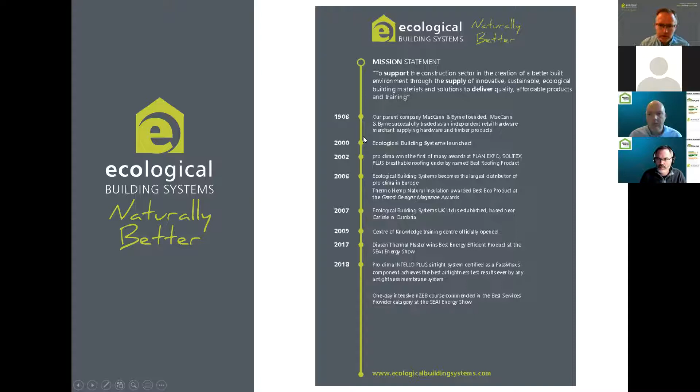My presentation this afternoon will focus on my own house, but I'll give some background information also about embodied carbon and energy and why that's so important. I'll be speaking with my Green Building Council hat on, as well as Ecological Building Systems. In the presentation I'll give a brief background on the project, why I selected the materials I selected with some details, some of the challenges I had to overcome.

There's a lot to go through, so this will be a whistle-stop tour, but hopefully I'll keep the schedule. I know Barry and Simon will pull me off the screen quickly enough if I'm in trouble.

So I built my house in Cavan, that's where I'm from. This is a picture I took during lockdown one morning last April. I was out for a walk with the dog, and my house is just down here. I'm overlooking 3 lakes here where I live.

My father owned the land where I built, and I was very lucky and blessed to have inherited a site about 20 years ago. Really, I wasn't sure if I'd ever build, but 3 years ago I started that process and started building.

Just one thing I wanted to begin before I go into the details of my project was it's World Green Building Week this week, and this year the focus is on building resilience, which I think is very topical and relevant, and also ties in well with my presentation about my house and building with more sustainable materials. There are a number of events on for World Green Building Week that I'll give a link at the end that would be well worth referencing.

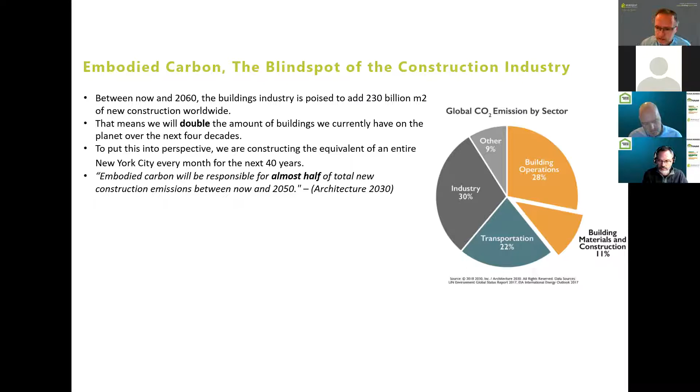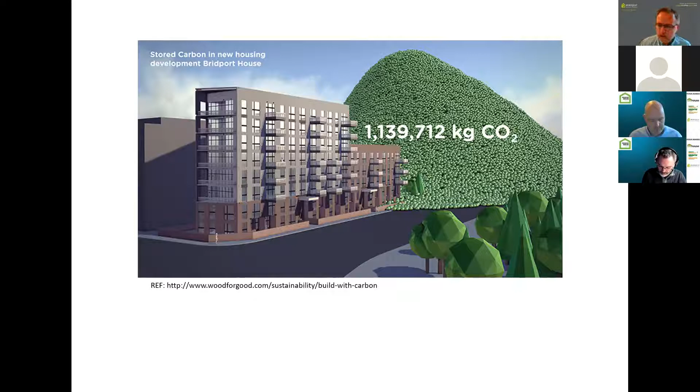And instead of just burning the wood in a stove or something like that, using it for something that's much longer lasting and with much better environmental output.

If we build clever and build less, of course, if you build nothing, that's going to have the optimum effect in terms of environmental impact, but we have to build. If we leave it till too late in the process, we can't have that impact.

So as passive house designers and as homeowners and builders, it's really at the design stage that we have a key role to play, to build clever and optimize material usage, and then build efficiently using low carbon construction technologies. And then over the life cycle of the building, it's the operation and maintenance that has the environmental impact.

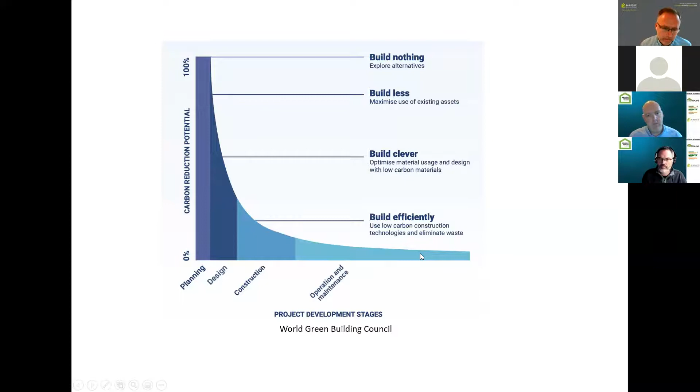Insulation, as well as standard building materials, does have an environmental impact as well. Of course, insulation is there to reduce heat loss, which is very beneficial. But different insulation types can have significantly different emissions.

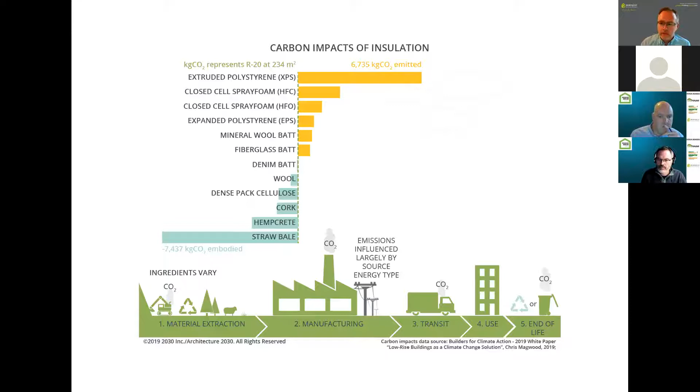So most recent central bank figures in Ireland suggest, now this is very debatable, but we need about 34,000 houses in the south of Ireland per annum for the next decade. Ronan Lyons would say we need 50,000, but let's say we need 34,000 houses.

Research also suggests, on average, carbon emissions associated with the construction of a new house in Ireland is around 30 tonnes. These are the upfront emissions. This will result in over 1 million tonnes of emissions each year from building, and this is not to do with operational energy, this is just the materials.

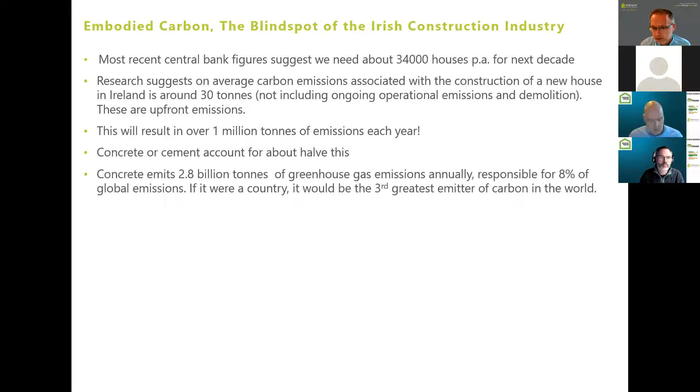Concrete or cement account for about half of this. Concrete emits about almost 3 billion tonnes of greenhouse gas emissions annually. It's responsible for 8% of global emissions. And if it were a country, it would be the third greatest emitter worldwide, after China and the US.

And since the introduction of NZEB in 2019, embodied carbon now accounts for the major proportion of emissions, approximately 50% of the total life cycle emissions of new homes. So are we looking at the target and missing the point if we're building low energy homes with carbon intensive materials?

According to the Irish Green Building Council, unless embodied carbon is tackled, building 500,000 houses as envisaged by the National Planning Framework and all associated infrastructure will result in 38 to 50 million tonnes of carbon emitted up to 2040. Our Climate Change and Low Carbon Action Planning Act requires our emissions to fall by 3.5 million tonnes per year by 2030. We need to commit to net zero carbon building, account for operational and upfront emissions, and encourage the use of more sustainable materials and design principles if we are going to have any hope of meeting these targets.

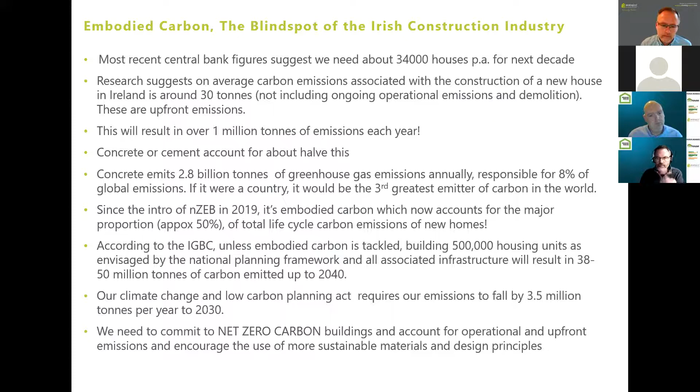So in terms of my own house, just going into it as a case study, I lived in a village nearby and I used to cycle over and back. So this is where the climbing began at the start of my house.

My house was built, as I showed you in the image at the start, in this field. I inherited this site and I was really lucky to have good south-facing access overlooking these lakes. My architect was Niall Smith in Kingscourt.

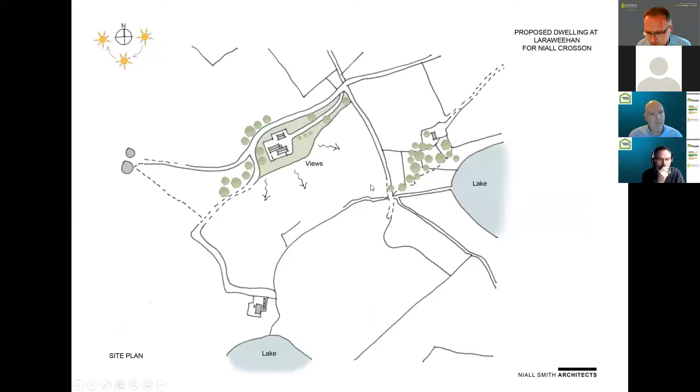We came up with some doodle drawings and sketches of what he was thinking would be suitable. I gave him my ideas and he came up with his ideas. Then my wife intervened and she took over, and well, let's just say we came to a compromise.

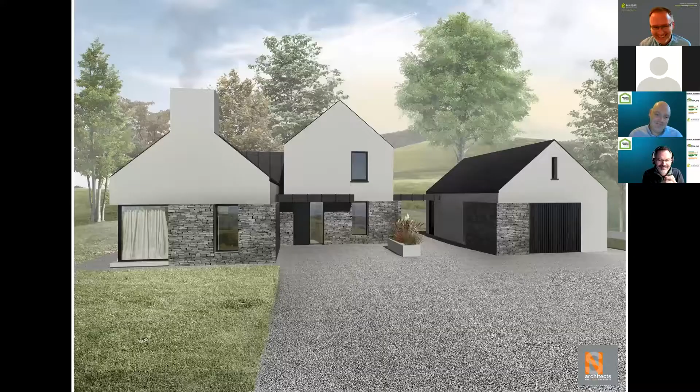So we can see here, this is the section showing the house. It's a vernacular design based on the local farmhouses of the area with the gables and so on, but has a contemporary style to it. We have a garage here on the north orientation, and the utility, bathroom and so on the north elevation. Then this is the south orientation where we have open plan, and we have bedrooms upstairs here.

This gives you a better picture here. The timber frame company I worked with was TimberTech Homes, very good with Fergal and the team. This is one of his 3D sketches showing the plan of the house.

So we are on the southern orientation here with a carport and then the garage at the back. This just gives you an idea of elevations and some of the details we had to work with.

In the house, basically on the ground floor, from the outset, like any of you accustomed to Passivhaus are very familiar with, we had to carry out a red line rule, which is relatively straightforward. The house is pretty much 2 square boxes side by side, and that was relatively straightforward on the ground floor.

But on the first floor, my wife, who was always right, wanted a room above the kitchen here, which I wasn't too sure about. I was being selfish, thinking about airtightness, thermal bridging, and thermal continuity. But this room she wanted to add above the kitchen in the open plan meant we had to create a link from this block to this block on the first floor, which meant we had to cross the airtight plane, which I never advised, but we did that in my house.

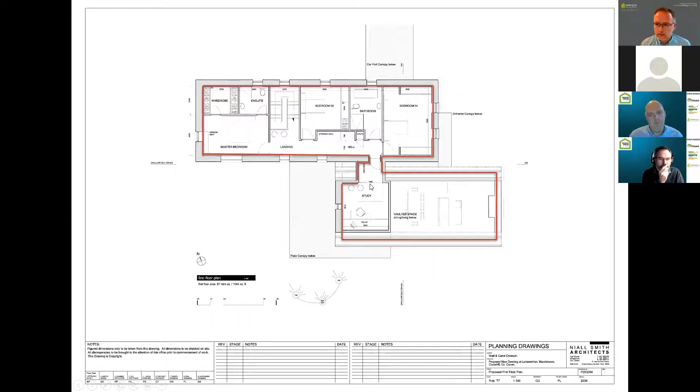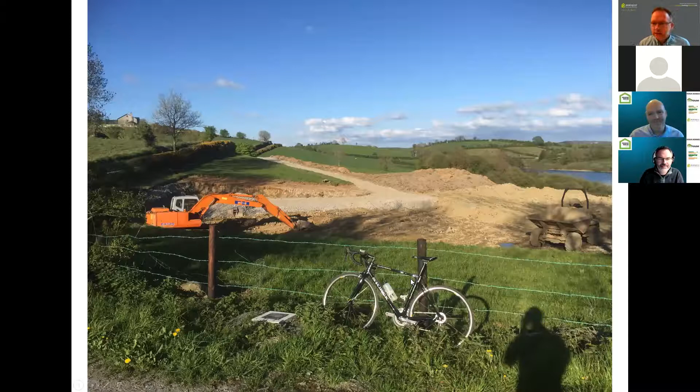The foundation went in, it was a passive foundation. During that time we had a heat wave, so there was a delay in getting the screed poured, which gave the heat pump company an opportunity to create a drone shot of the foundation and their work going on.

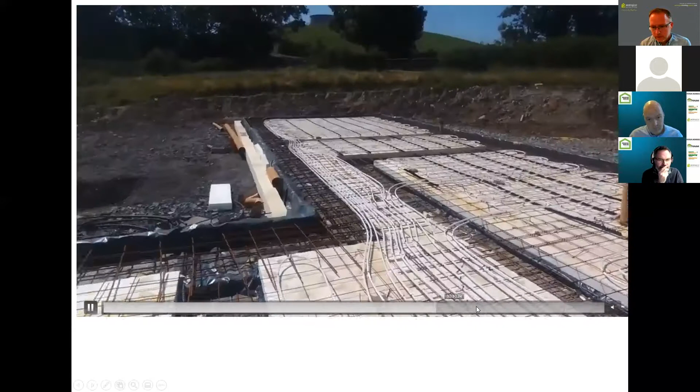So that just gives you an idea of the passive raft going in. I'll just move it on a little. That gives you an idea of the weather - we were very lucky, it was very good at the time, and that all went well, thankfully.

In terms of the wall build-up on the house, I had a plasterboard inside, then a service cavity, either 50 or 80 millimeters depending on the location, filled with Thermafleece sheep wool. Then I had a certified airtight racking board on the inside, sealed at the joints with the Proclima tapes.

Then I had a full fill 225 stud filled with blown wood fiber called Gutex Thermofiber pumped in the cavity. Then Gutex insulation called Multitherm on the outside, a Proclima Solitex humidity membrane on the outside, and a vented cavity.

Then on the outside I had a mix of finishes - cement board, larch, or a concrete block with stone in front of it in some areas, and this vented cavity.

So the U value on the wall was 0.11. On the floor, the U value was 0.09. I had a passive slab. You can see here the key continuity details between the external insulation meeting the insulation on the floor.

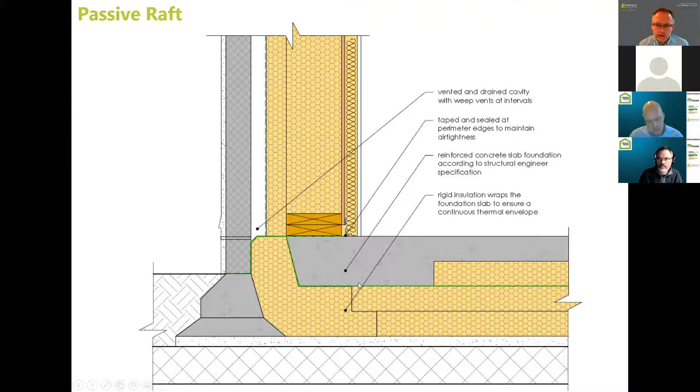And the frame was getting ready for site by Fergal and the team. So I went and visited one day, had a look at it, and there's Fergal making sure everything's in order.

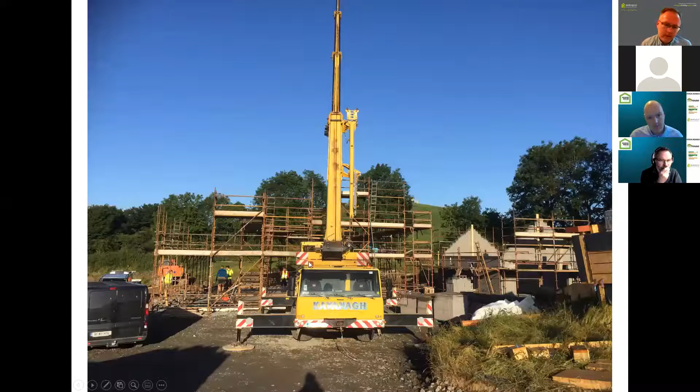And the crane was arranged by the timber frame company. They erected the panels, and during the process, it was done over a day and a half. The full frame panel was erected.

We could see the detailed work by the team at TimberTech here, putting in Solitex Plus as the airtight lap between floors. The guys in TimberTech were very tedious and careful with that - that's an absolutely vital part of the process.

Also note on the timber frame panels, it's an open panel. In the factory, I instructed the guys to pre-drill the panels in preparation for the pumped insulation at a later stage that's going to go into the panels.

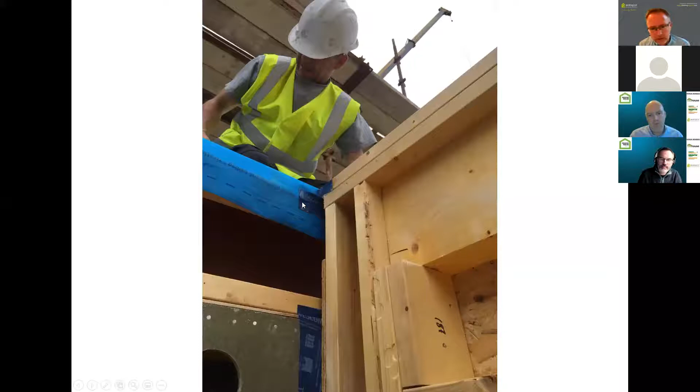I had Roman from Clima House with me there the day the frames were erected, just making sure a few details that were quite complex, such as the loop I was mentioning earlier, that we absolutely nailed that junction.

Because if you don't get it right at this stage, it's really difficult, if not impossible later on, to get these junctions correct. So it's very important to make sure we cover all these angles and address all these details correctly.

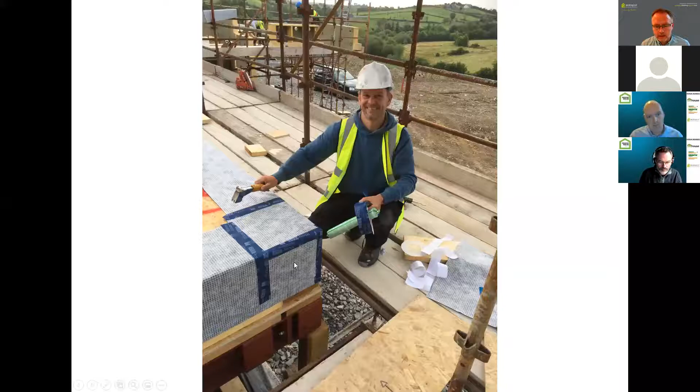So this is the connection that I mentioned between the two blocks that was quite intricate. And here we can see the floor panel that went in. We had a lap going from downstairs to upstairs on both sides, and we had the lap from the two blocks returning back to the inside here.

Then we had the wall panels go in. So now we return this up against this and up against this, and this is the certified airtight racking board that we're gaining our continuity with. But that needed to be watched. You had to be like a hawk to make sure later on plumbers, electricians, or other trades don't damage that. Just had to be careful.

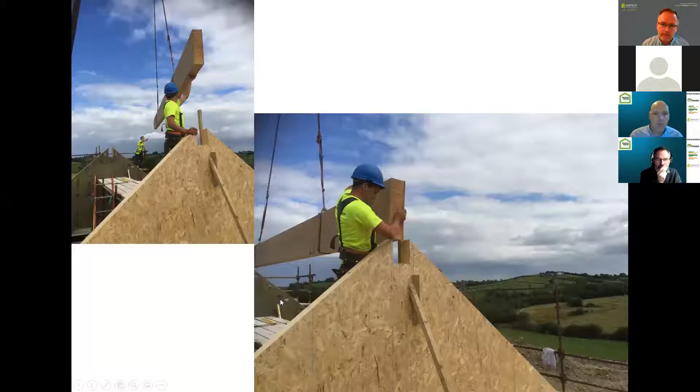This is a large glulam beam that went in at the ridge of the building, and I really wanted to expose that at the end of the project. I didn't want the plasterboard to cover it. So they carefully put it in, but I just showed that image and I'll come back to it later to explain why.

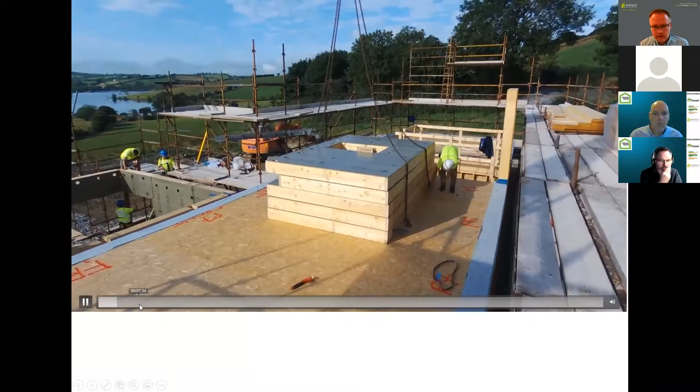So it's just a very brief video showing that day when the frame was going up, just a few drone shots I took on the day. You can see the panels all pre-drilled, the guys carefully managing the panels on the site. It gives you a feel for the processes and the time and the skill that's needed to get all that right.

On the building, I had two roof types. I had a cold roof on the bedroom side, and on the open plan, I had a warm roof. I also had a flat roof, a hybrid flat roof, where I insulated above and below with full fill insulation. I have data loggers and monitors in them, and they're all working really, really well. I also WUFI modeled a lot of the details just to see how they correlate with the monitors I've put in. It's very interesting, but I'm not going to go into that now.

Here we can see the roof slates, the tile battens, the counter batten, the Solitex Plus Connect I used, which is a pre-applied tape, above the Gutex Multitherm on the outside. Then I've full fill thermofiber - this is 80 millimeters and 220 of blown wood fiber. Then I have the Intello Plus membrane for air tightness and vapor control here, an 80 millimeter batten and plasterboard, and the heat recovery ducting ran in here, as well as the insulation I used there was sheep wool.

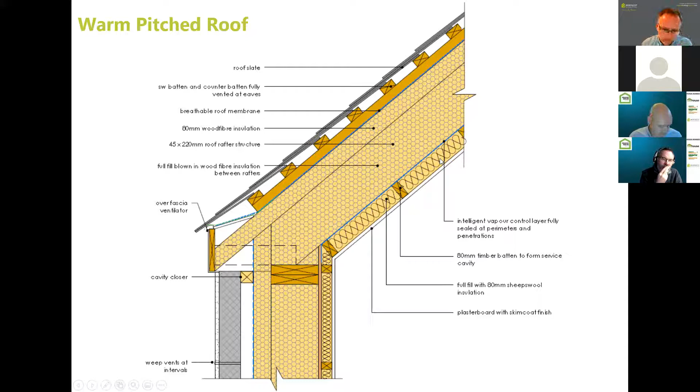According to the EPD, the environmental product declaration for the Gutex boards, I calculated that based on the amount of these boards I used, I sequestered about 8,500 kilos of carbon. That's locked up within - instead of giving off carbon and emitting carbon in the production process, my fabric has sequestered within that Gutex 8,500 kilos of carbon.

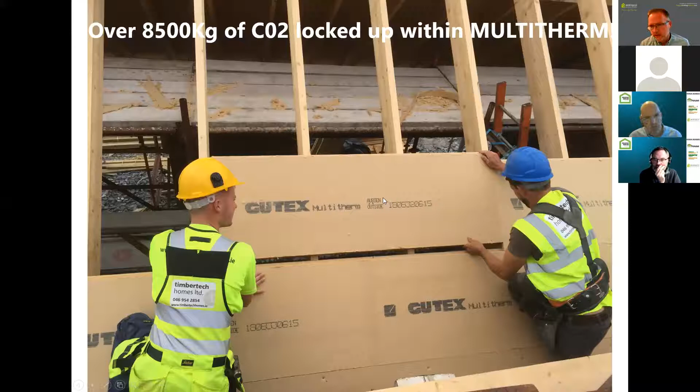There's many forms. Over the wood fiber, then I applied a windtight membrane, the Solitex Plus Connect, which is a pre-applied tape, so I don't need to be taping joints - it's just a double-sided tape already there. So it's very easy to get wind tightness with that.

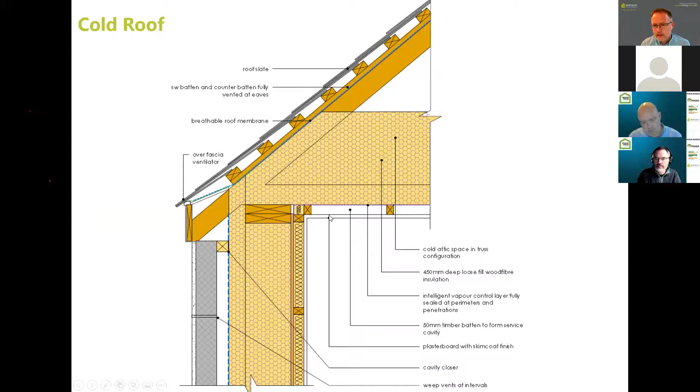On the cold roof, on the other hand, I just ran the felt all the way up the roof. I had a counter batten again, and I used about 450 millimeters of the Gutex thermofiber open blown in the attic, which I sheeted out at a later stage. Then I had Intello Plus on the underside, linking into the air barrier on the wall. And there you can see the roof.

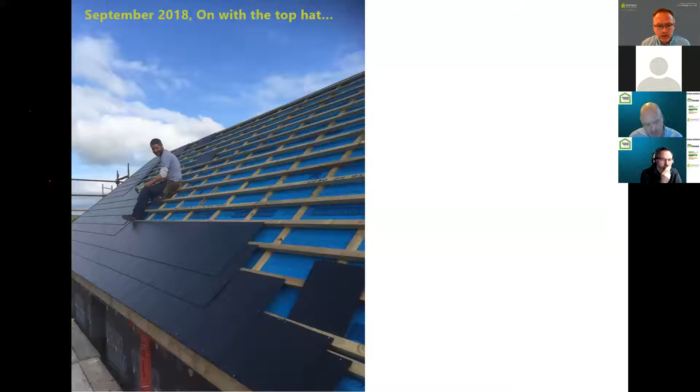Then I spent about 4 or 5 weekends with my brother-in-law, Paul, who's a roofer. I had a great time slagging the engineer, trying to put slates on the roof, but I did my best, and we spent a few weekends doing that. So we used Cembrit slates on the outside and just covered it all. It was pretty straightforward.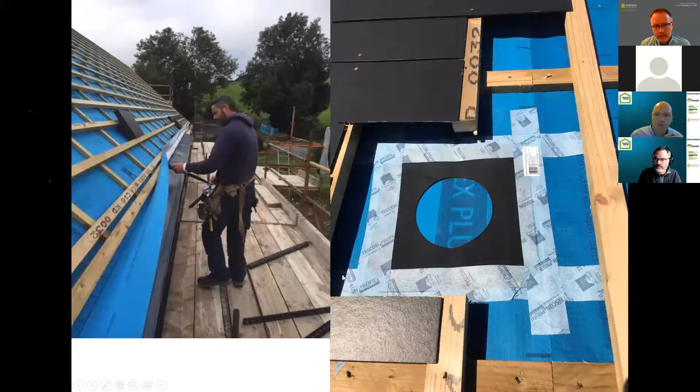But we had to be careful with making sure we put grommets in specific locations for the soil vent pipe, as well as for the heat recovery exhaust. So I had to pre-plan where to locate these grommets early on, just to give good wind tightness on the outside.

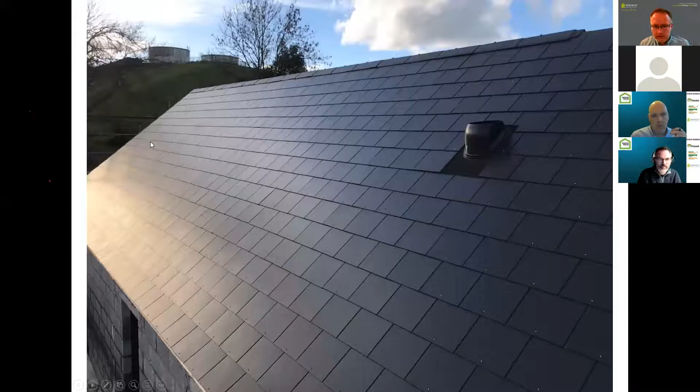And there you can see the roof almost finished. So then we got weather tight, got the windows and doors in. And then the air tightness work could commence now that we were weather tight.

The key for air tightness is coordination with the electrician, the plumber, the plasterboard installer, the glazier, everybody. We had regular meetings on site to make sure everyone knew what they were doing and where the air barrier was and what the consequences were. Basically, if you found a leak, just let me know and I'll fix it. I'm not going to take the ruler out.

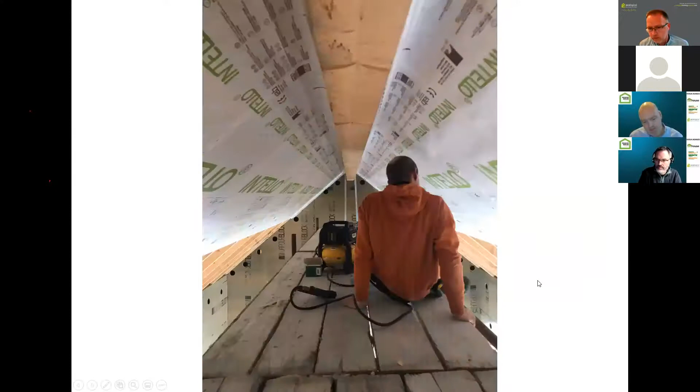So then we got working on the air tightness. I started fitting the Intello with Roman. You can see Roman at that ridge beam, putting in the membrane in the open plan, gluing it to either side with some ORCON F. Then making sure at the ends we seal the straps and joints in the certified airtight board. Later on the blown thermofiber, the wood fiber, is blown in here, and then a patch is put over this.

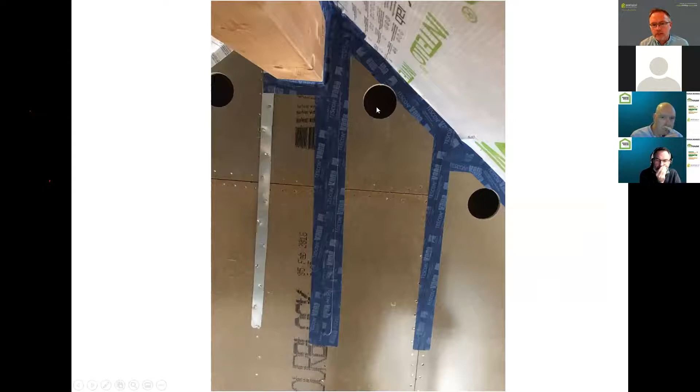So here you can see the membrane fitted throughout that whole roof, and it's finished.

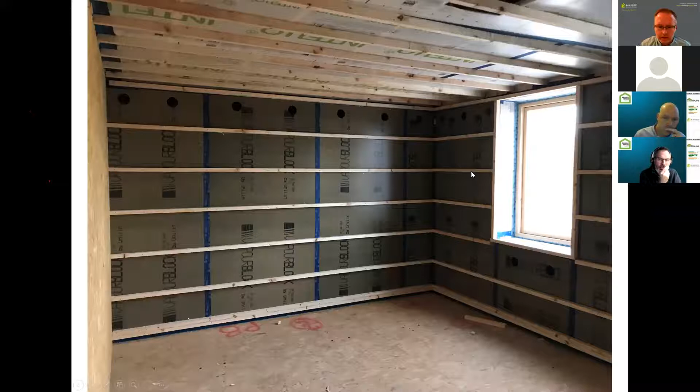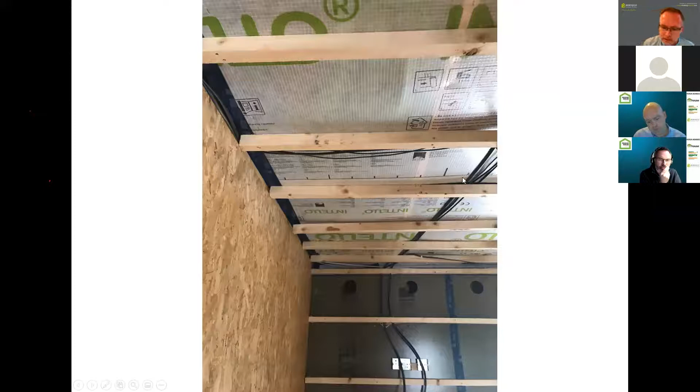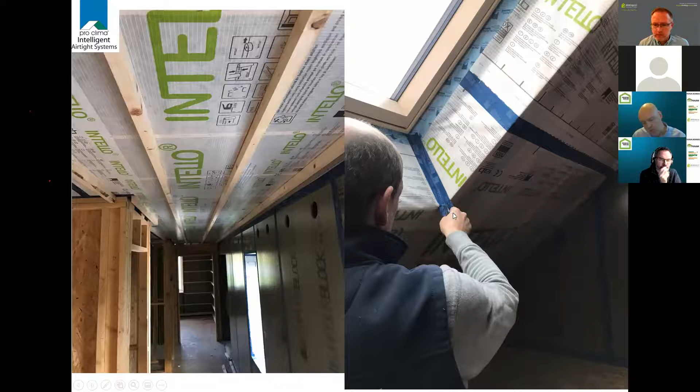A key point often repeated: planning for services and making sure you put in these service battens is absolute gold. It's critical for the electricians and plumbers that come at a later stage. The electrician, on his first Passivhaus, was an absolute joy to work with and very enthusiastically embraced the principles, looking for grommets and taking care. You can see the benefit of these battens for services, and good care and attention to detail around openings, using the right tapes and pressing them firmly home when applied.

Another point is for the valves, for the supplies and exhaust for the heat recovery unit, I used EPDM grommets. I could have used tapes, but these grommets give far better flexibility for the electricians or plumbers later on if they have to move stuff, and it's far easier and quicker to fit.

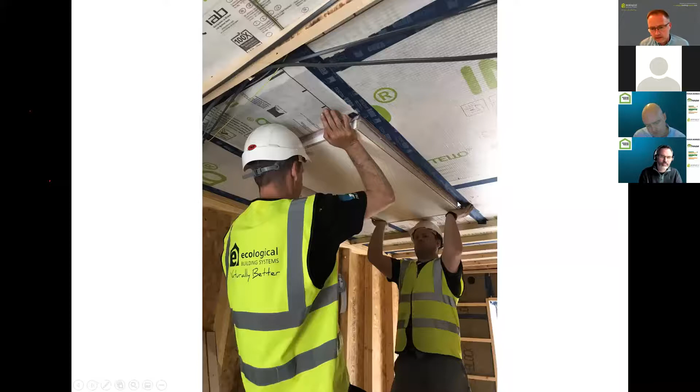A key point was to make sure the attic hatch was fitted airtightly. This attic hatch comes with a sealing system, certified airtight and pre-insulated, and that's what I used in the attic. It's called a Wellhofer attic hatch.

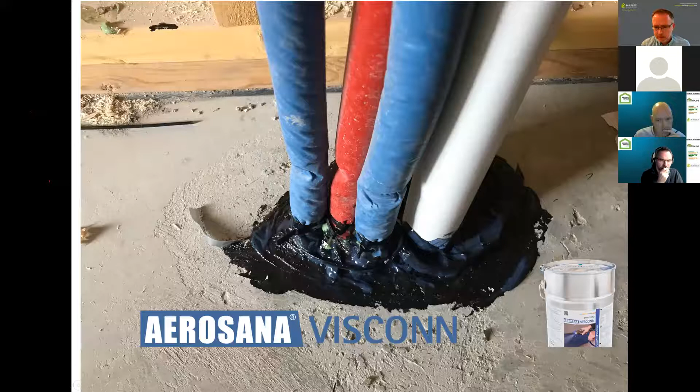For tricky junctions that you just couldn't avoid, like where you have manifolds or a few pipes coming up through the screed, I used the Aerosana Visconn. This is a certified airtight paint around these points.

Through the whole build process, I had regular training sessions with builders, local architects, and planners. I invited local councils in, and people came from Dublin and even from Monaghan, down to some of the open days. This is one open day I had, and there's a video on our website showing it, where speakers from the ventilation company, the heat pump company, the window company, and the architect all gave presentations on the day. That was really rewarding, sharing the information with them before the plasterboard went on.

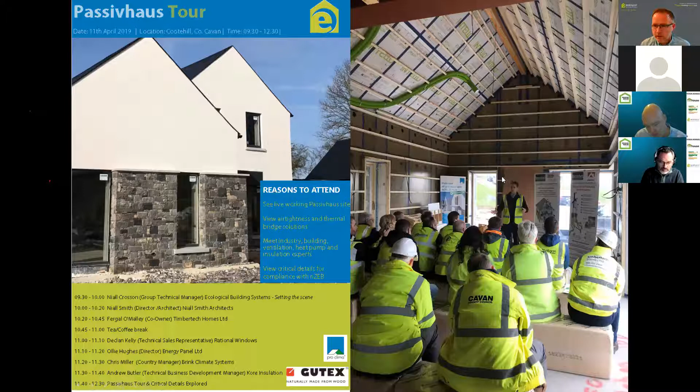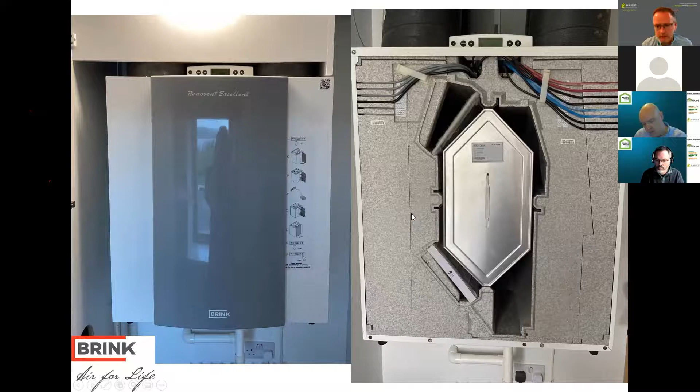The heat recovery unit is in a press, easily accessible. I used a Brink Renovent Excellent 450. You can see where I live, it's quite rural, there aren't any buildings near me, but even so, this is the pollen filter after 3 or 4 months earlier this year. So it just repeats that necessity to maintain these units and change the filters regularly.

But I have 2 of my 3 children with asthma, and since I moved into the house nearly 2 years ago, we haven't had to use the inhaler once. So that's testament to the air quality in the house, the comfort levels, and the benefits of having these systems.

For hot water, I have an air-to-water heat pump called a Daikin unit, and it supplies what little heat I need. I put in underfloor heating on the ground floor.

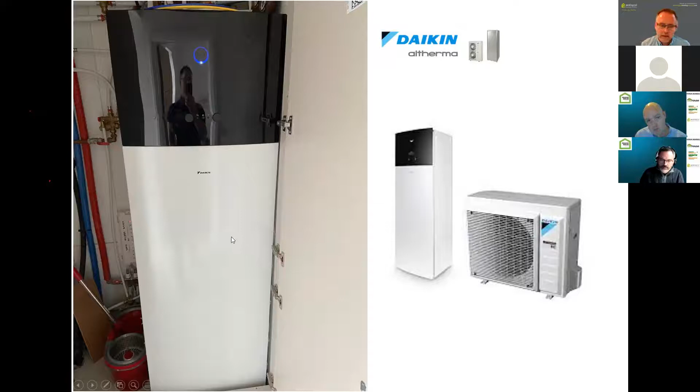But there you go. Everyone is open to missing something, and you can see there are ways and means of getting over this. But that was one point that I missed.

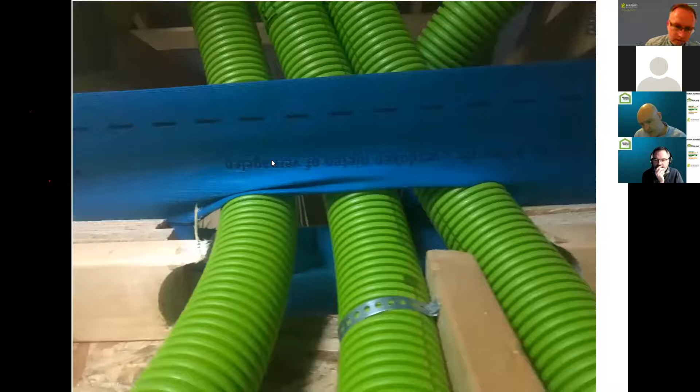Another point to be mindful of is subcontractors on site. I went through in great detail with the company fitting the ducting about being careful with these pre-applied airtight laps above some of the top rails. Not only was the top rail butchered, but the lap was also badly damaged.

That had to be fixed later on, and we did fix it and retrieve the situation. But you can see the need for oversight is critical on any build, Passivhaus or anything.

I said to the electrician, he was excellent, but he just had one thing here. I noticed this cable coming through a top rail, so I spotted that, and we could easily access it from above and seal it. You can imagine later on it would be tricky to seal from below, and you could get resultant leakage through the joint in the timber. I know that sounds a little obsessive, but we're all a bit obsessive about these things in the Passivhaus world, I find.

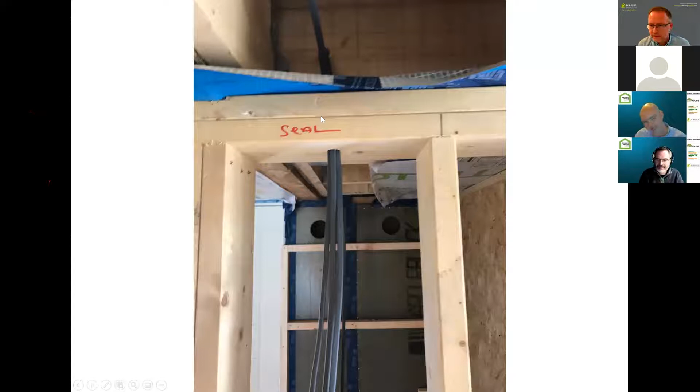Some areas we couldn't get the grommets in, like the transition of the heat recovery ducting from the 2-story block over to the open plan, where the ducts were coming down this wall. So we used this butyl tape called Extoseal Magov. It doesn't look the neatest, but it's a really effective way of sealing around these awkward junctions with a butyl airtight flexible tape at those points.

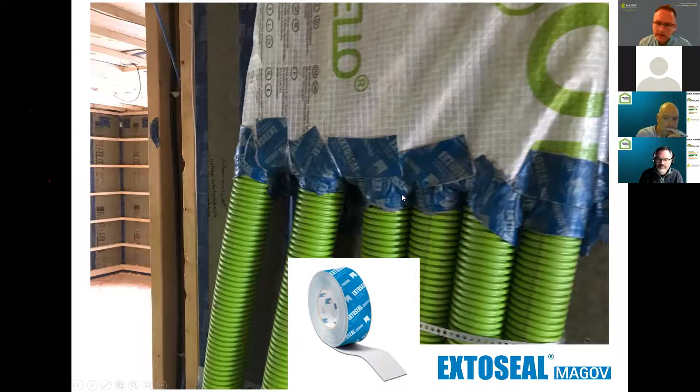Another challenge or slight oversight was we didn't put certified airtight boards in this position on the wall, whereas it was to this point - OSB was used here. So we had to put the Intello in front of the OSB to prevent air leakage at that point. It wasn't a large area, but we wanted to make sure it was airtight. So the transition in elements can sometimes be a bit tricky. You could think you're on an external envelope when you're on the plans, but you'd think that's an internal wall when it's actually an external section.

Once we made the building airtight, our blown Gutex arrived - the loose fill wood fiber - and it was going to be fitted by Roman. Within that lorry, we have 1,650 kilos of sequestered carbon within the thermofiber.

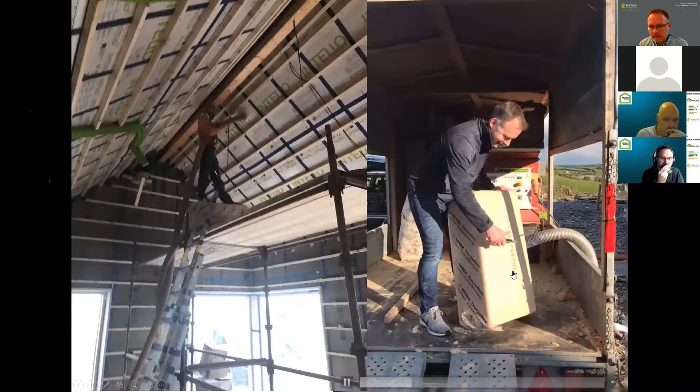The thermofiber comes in these bags. You just cut the bag, put it in the hopper, it mixes it and breaks it down, and then Roman pumps it in and fills the cavity.

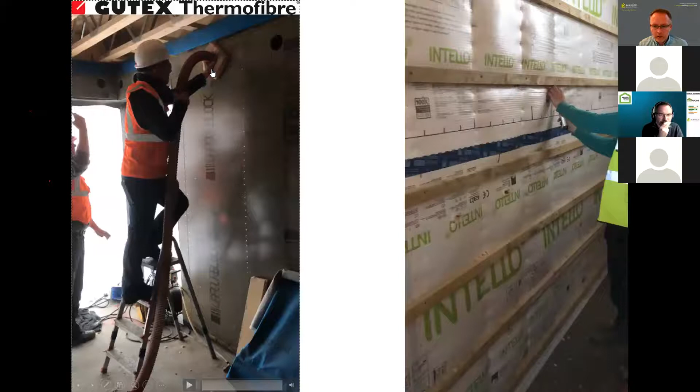So here we are, this is another training day where we fitted the thermofiber. I'm actually pumping it into this cavity here, filling the stud. It's 225 deep with the Gutex thermofiber. This stud took about 60 or 70 seconds to fill. You can see it's filled on that side, and on this side here you can see...

Roman showing this one here. Can you hear that? So we're just showing behind the Intello - this is the pumped blown wood fiber. You can see it's fully self-supporting, there's no settlement. The minimum density is about 32 kilos a cubic meter, and it has an ETA approval. It's really good, really nice to work with.

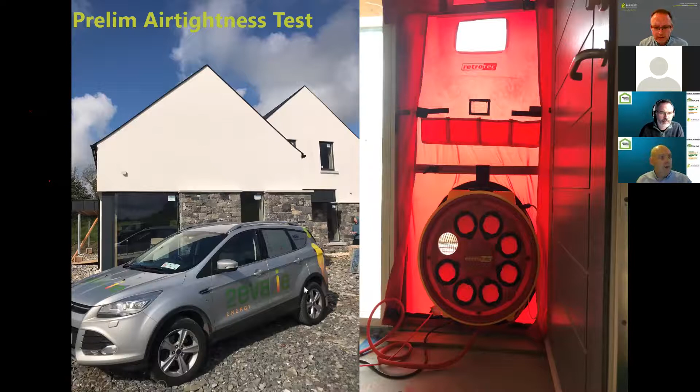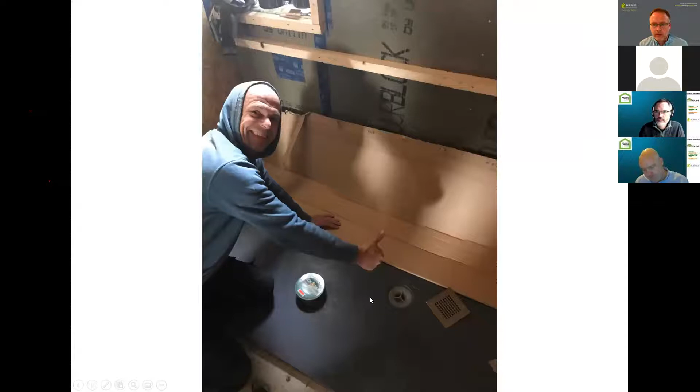Once the thermofiber was blown, it was time to get the preliminary airtight test. Mark Shirley from 2AVA came up and carried out a test, and we found some leaks at the usual spots - the drains, and some spots where there wasn't water in yet. At spots like that we found a bit of air leakage. A few of the spots we found air leakage, but overall it performed quite well, and we got an N50 of about 0.38 at that stage.

Then we proceeded to fit the sheep wool in all the service battens. So myself and my 3 kids, who I paid handsomely, installed the sheep wool, though I promised the 3 kids didn't go up here - I did that part.

Once that was done, it was slabbed, and we got our final test done.

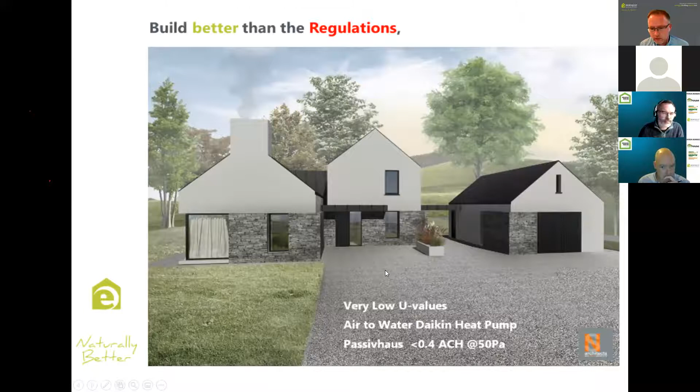In terms of the building itself, myself and my colleague Joe in the office carried out an exercise where we looked at the house in terms of its performance in relation to PHPP. By inputting the values using the local Irish weather data and the latest electrical cost consumption at the time from the SEAI database, and based on an elemental U value of 0.1, we put in all those values and calculated the energy demand and the resultant cost.

If this house was built to an N50 of 5, we would see the running cost was predicted to be €1,739 for space heating. But because it got 0.4, the estimated heating demand and the resulting heating cost was down to 328. So that just shows, everything else being equal, airtightness really does join all the dots up.

It is that vital for making sure everything works. Your U values are important, thermal bridging is critical to avoid, and making sure we have good ventilation. And the airtightness just ties it all together.

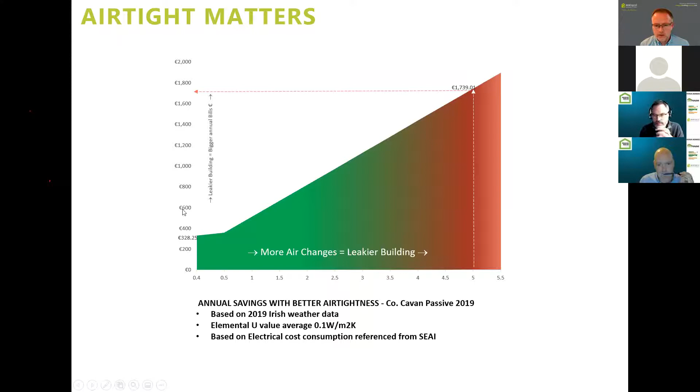In terms of the preliminary Passivhaus cert, the heating demand is estimated at 11 and the heating load at 10, and the primary energy is at 95. So it ticks the boxes from that point of view, and I'd hope to get my cert within the next week or two, the final certificate.

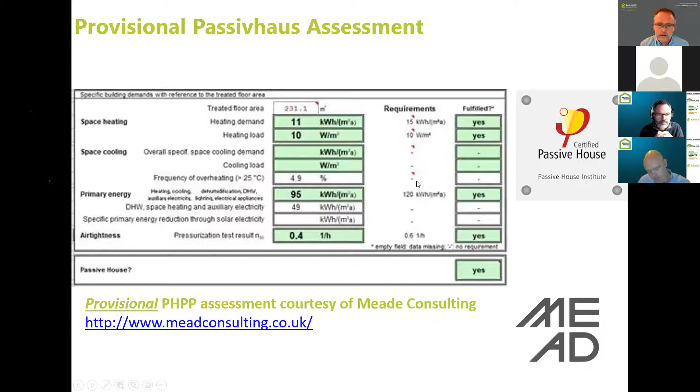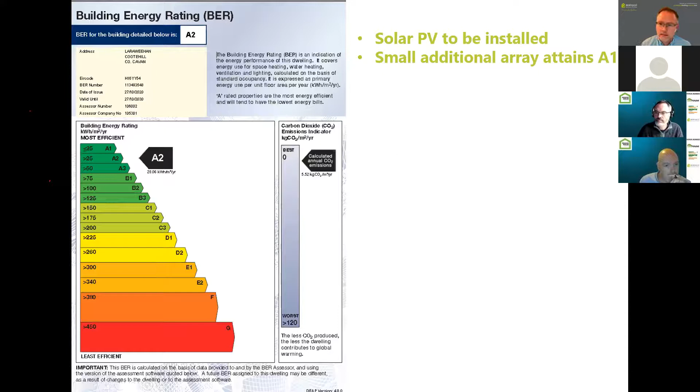In terms of the BER, it achieved an A2, just borderline A1, 28 kilowatt hours per square meter per year. But I do have provision to put PV in our lawn, and just below our lawn there's a space I'm ducting in, and I hope in the next 12 to 18 months to put PV and a backup battery, and hopefully we'll see. So this is the house taken about 12 months ago.

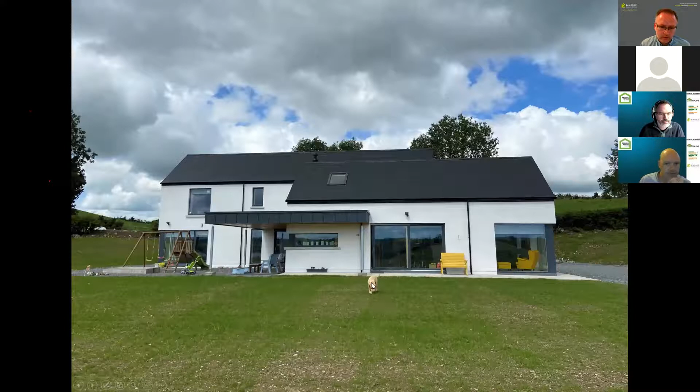It's moved on a little since then, but you can see it's taken shape. This is Lola, the dog, who's scratching to get in the door at the moment. You can see outside there's still work to do, but it's all small steps and taking shape.

You can see these are plans for the future to put some wildflower and trees in here. That's what we're planning over the next few years, to put trees and wildflowers around. In this area we're putting a pergola in, or some kind of shading. That's something we plan to do, but we just didn't do it at the start. But definitely in this southwest orientation, to reduce overheating in that room, it's an absolute need.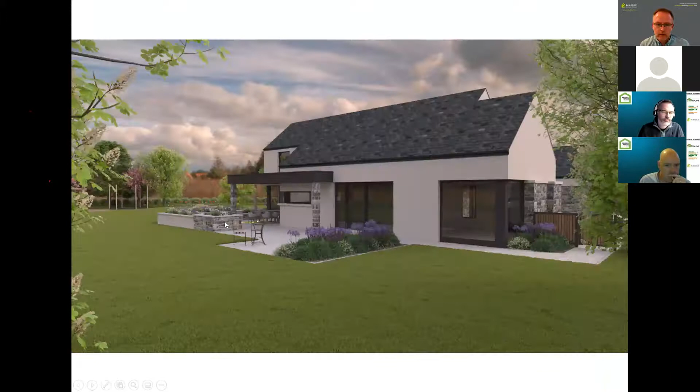So that's basically it. To conclude: airtightness really starts at the conceptual stage. A lot of you know this already. Start early and reduce complexity.

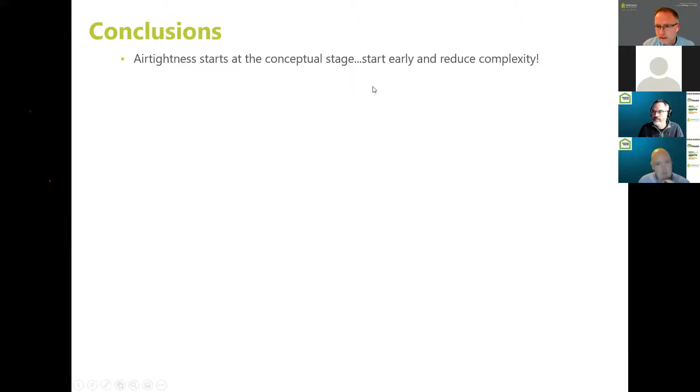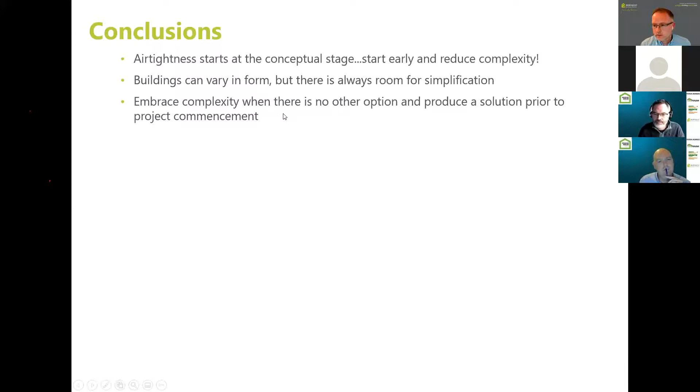But as I've learned on this project and many other projects, buildings can vary in form. There's always room for simplification, and where complexity arises, embrace it - you just have to go with it and come up with as good a solution as you can beforehand and on site with the right team.

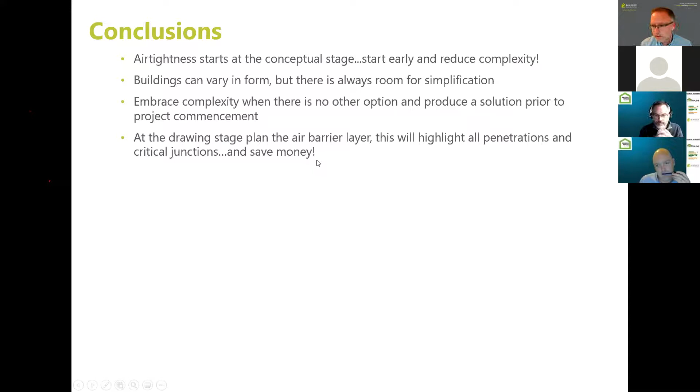At the drawing stage, plan the air barrier layer and highlight all penetrations and critical junctions to save money. The rule I often repeat is: the easier the detail is, the less material you need, the less man hours you need, the better the result and the cheaper it will cost. The more complex the junction is, the more material and man hours you'll use - it's going to cost more and you'll likely get a worse result. So it's all about simplification if you're talking about saving money, and that's central to Passivhaus.

Engagement, of course, is critical with all trades, and airtightness and controlled ventilation is the key link to healthy low energy buildings, which I've heard so many times, but now I'm actually realizing it myself living in the house. Airtightness really is the common denominator that links all trades together, and it's a real indicator of build quality. A really airtight house is a quality house.

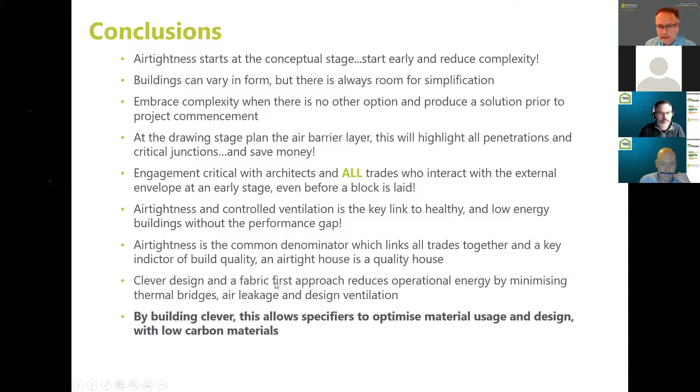And clever design and a fabric first approach reduces operational energy by minimizing thermal bridges, air leakage, and design ventilation. But by building clever, it allows the specifier to optimize material usage and design with low carbon materials. I mentioned environmental product declarations earlier - these are now going to be absolutely critical going forward in making good judgment on what materials to use within our specification. They give fully transparent information and help reduce greenwashing.

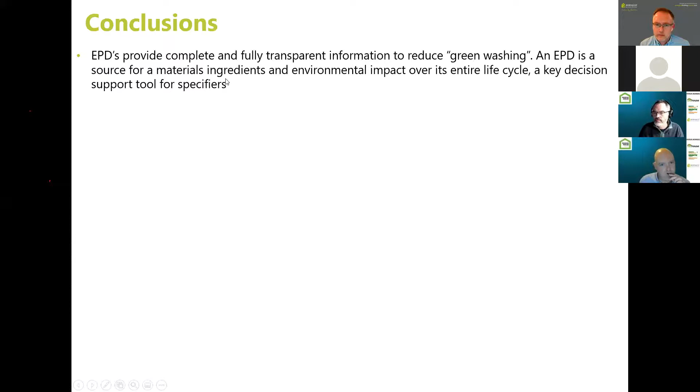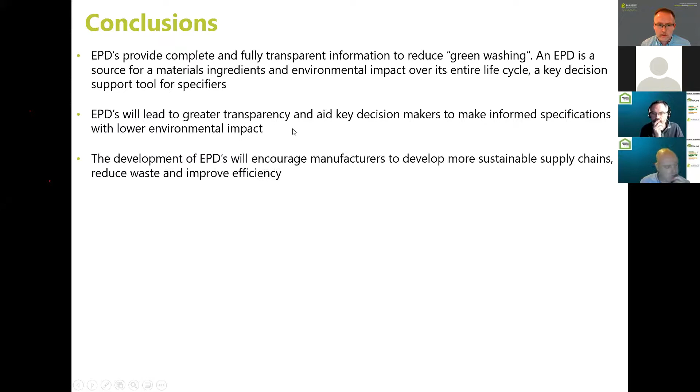It's going to lead to greater transparency as we get more accustomed to EPDs, to aid key decision makers at the specification stage. And the development of EPDs will also encourage not only end users but the manufacturers themselves to improve supply chains, reduce waste, and improve manufacturing efficiencies.

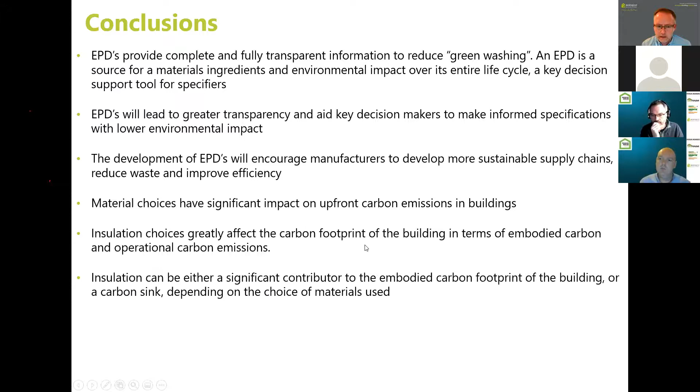Material choices have significant impact on upfront carbon emissions, and insulation choices also greatly affect the carbon footprint of the building in terms of embodied carbon and operational emissions. So insulation can either be a significant contributor to embodied carbon of the building or a carbon sink, depending on the choice of materials. As an example, in my house over 10,000 kilos of carbon was sequestered within the insulation I used.

Materials such as wood, straw, clay, and many other materials naturally sequester and store carbon and reduce the carbon footprint of the building.

I'm not going to bore you here, but one last point: some research from the IGBC on 12 apartment developments in the UK and Ireland found the embodied carbon, on life cycle analysis, ranged from 355 to 2,600 kilos of CO2 per meter squared per home, averaging 915 kilos of carbon per square meter. This embodied carbon is equivalent to 114 years of operating the homes built to the current A2 standard.

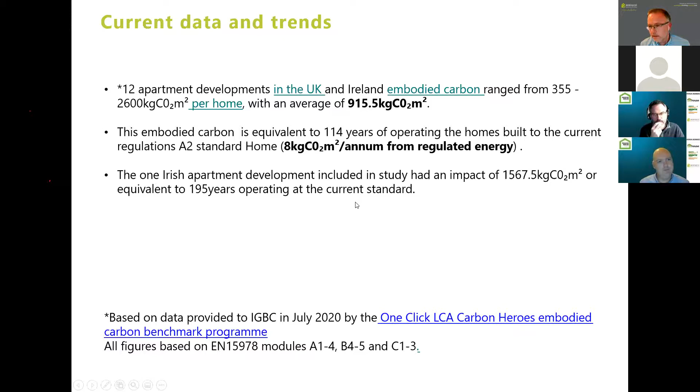The one Irish apartment in that development had an impact of over 1,500 kilos CO2 per square meter, or equivalent to almost 200 years operating at the current standard. So this really crystallizes the huge impact embodied carbon is having in terms of the environmental impact of building.

While the figures in Nordic countries are much better, based on 127 apartment developments, they had a much lower average of 365 kilos of CO2 per square meter. This demonstrates the huge potential and opportunity for improvement in tackling the carbon blind spot in the Irish construction industry. We're coming from a base where we've quite high carbon intensity, but there's huge opportunities there to reduce it.

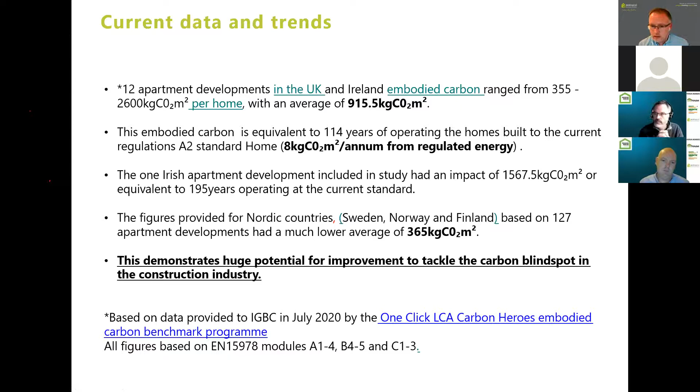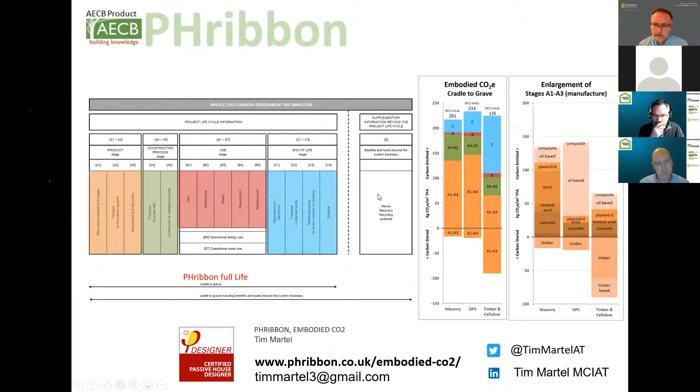Before I finish, Tim Martel has developed this software called PHribbon, which is a plugin tool for PHPP and allows you to make more informed decisions when you're designing a passive house on the environmental impact of materials over its life cycle. I think that's going to be a really useful addition to tackling embodied carbon in passive house buildings and all buildings.

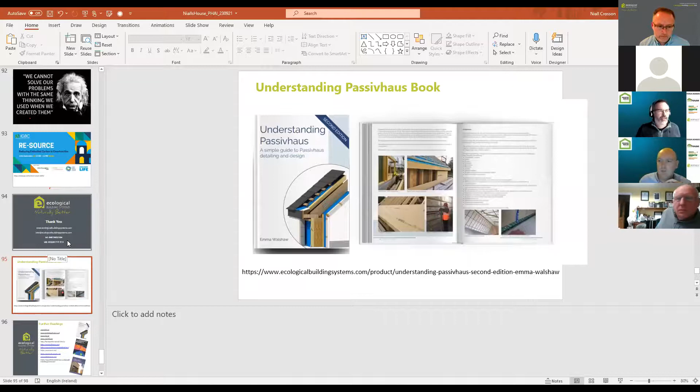Thanks, Niall. I think that was a really detailed look at your project. So thanks very much for that. Lots of really good information. A couple of observations. You made the point about a really good timber frame company and that on-site supervision, absolutely key. The airtightness team on site during construction, again, I think is really useful, even at the early stages, not necessarily when they're doing their main part. I kind of picked up on your no blame culture, which is another thing that's key to success. We want to know where the problems are, don't we? And then of course plan, and then plan some more.

So there are a couple of questions. There's still time for anybody out there if you've got a burning question to put it in the chat, and we'll try and get to them. You touched on it briefly, Niall, about overheating, and I was just going to ask, had you future plans for some additional shading? A bit like my own project, we haven't quite got it there yet. But how did the building perform, just out of interest, in the recent hot weather that we've had?

Over in the open plan, I have a good deal of shading in that area, so that was not too bad, that was okay. In the lower room where I showed the pergola at the end, that did overheat, and I had to leave the doors open a little at night, and that helped to allow some cooling at night. So then I pulled blinds down during the day. So during the really hot period, it did. So my intention originally was to put a brise soleil in over them windows in that corner. That's on the southwest aspect, which tends to get most overheating if you're going to get it. But I'm going to put a pergola in there, so I have to come to an agreement with my boss, who's not sold on the brise soleil, so it'll be a pergola, I think.